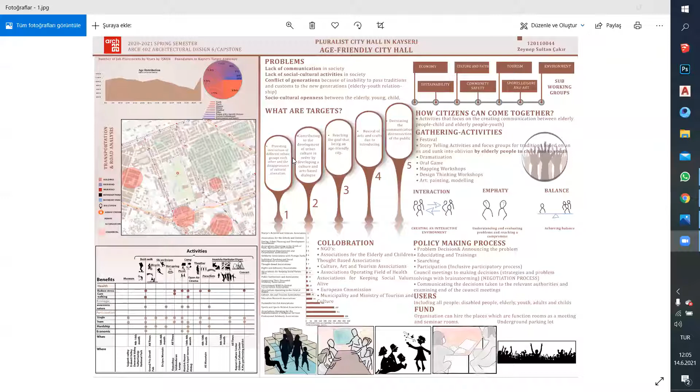The aim of the project is creating a pluralist city hall in Kayseri. The problems are lack of communication in society, lack of social cultural activities, conflict of generations, and social cultural openness between the elderly, young, and child. These can come together with some activities. The gathering activities can be festivals, storytelling activities, dramatizations, oral games, mapping workshops, design thinking workshops, and arts like painting and modeling. The most important thing is creating integration, empathy, and balance between the society.

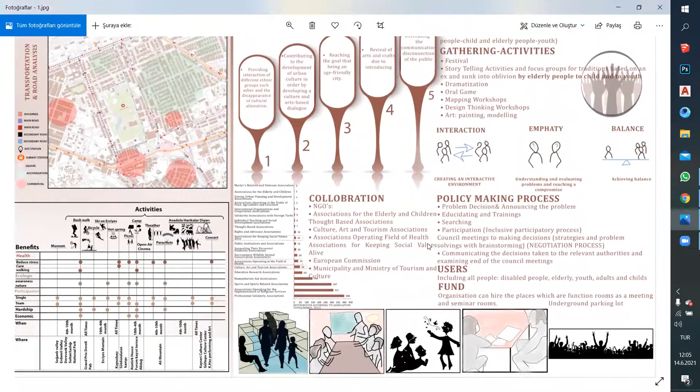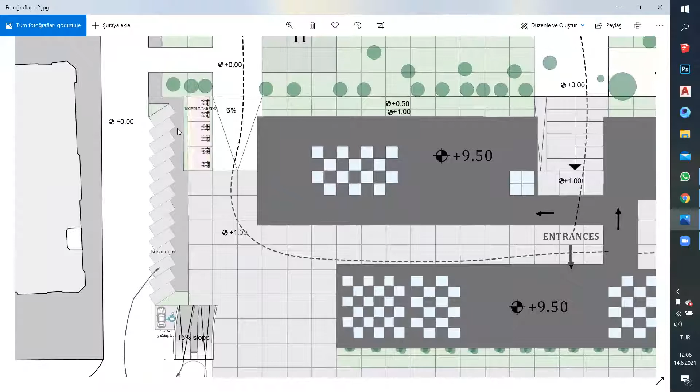On the site plan organization, the most important point is Mimar Sinan Street because it has a connection with the city center and it became a pedestrianized zone. The road is specialized for pedestrian and bike users, and traffic is slowed. There are some regulations of vehicle traffic, as you can see from this point. There is underground parking entrances, a parking lot, and bicycle parking also placed in that area. The entrances of the building are from this point, which connects the access from the park.

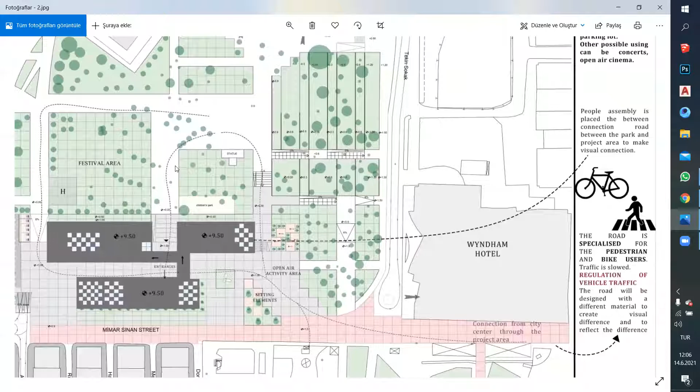Another important point is this area. There is a people assembly in that area. The people assembly has a connection between the park and the project area with these arcs. There's open air and sitting elements in that area also.

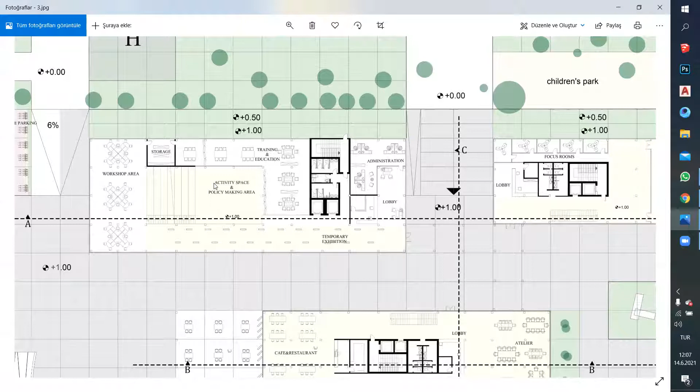On the ground floor plan organization, there are mostly communal areas. In that building, there is a lobby, atelier, and a cafe and restaurant. In that place, there's a people assembly, as I mentioned before. In that building, there is administration, training, education, and workshop areas. The activity space is placed in the middle of the building. The activity space is important because it makes a visual connection with the upper floor.

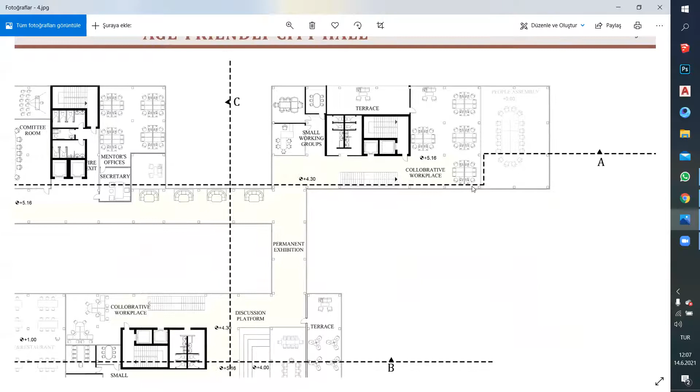There are some important options we will see on the sections. On the upper floor, there are committee rooms, meeting rooms, and seminar rooms. There are mentor offices with this bridge, reaching small working groups and collaborative workplaces. There's a visual connection with the people assembly in that place. With the permanent exhibition, we are reaching the discussion platform.

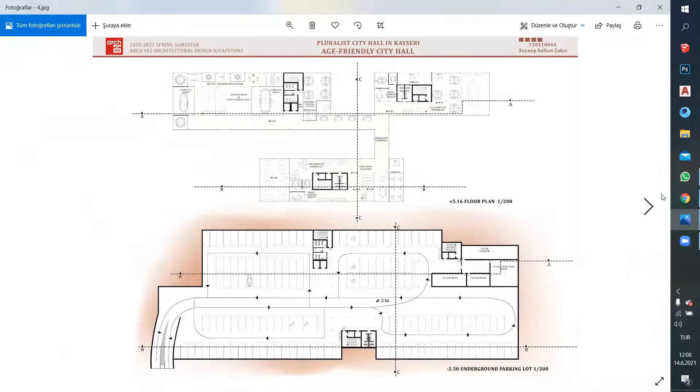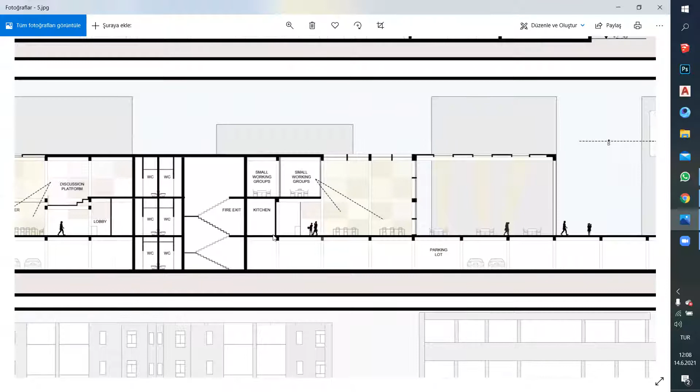There's a visual connection also with the ground floor, with that atelier, and there's a collaborative workplace and small working groups in that area. This underground parking lot is the entrance, and there's a technical facility in that area. In this section, the atriums are visible, and the visual connection is also visible between the meeting rooms and the activity space, and also between the people assembly and the collaborative workplace. These are sitting areas between small working groups and the cafe, and between the discussion platform and the atelier.

On the section, we can see the connection between Mimar Sinan Street and Mimar Sinan Park mostly. On the facade organization, similar to the site plan organization, the grid system will be used. In the east elevation, we can see the connection also with Mimar Sinan Street and Mimar Sinan Park. It's visible in that place.

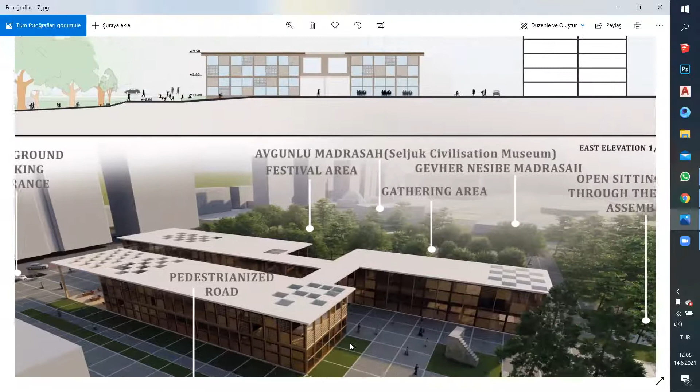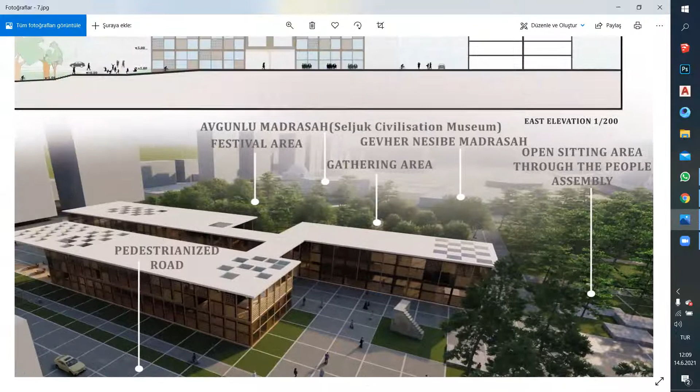This is the underground parking entrance, this is the pedestrianized road, and there are important historical buildings in that area, which are Avgunlu Madrasa and Gevher Nesibe Madrasa. And this is the festival area. In that place, there is a sitting area, as I mentioned before. On the conceptual section, it's taken from this area. We can see also visual connection, and also there are roof openings in that area.

On the construction, a wooden structure will be used. The main material is wooden in that building, and for the floor, cross-laminated timber will be used. For the columns, glue-laminated timber will be used. For the facade organization, a double facade system will be used. Outside, there's glass; inside, there are wooden profiles.

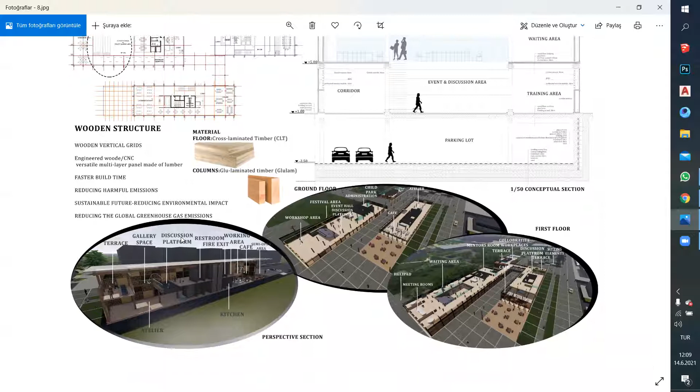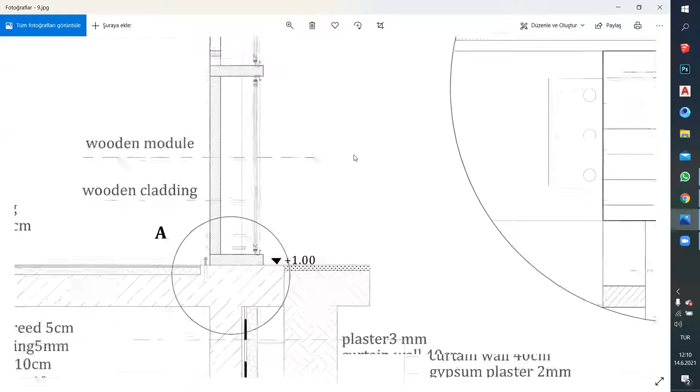In this perspective section, we can see also the visual connection, and these are the spatial organization. This is the system section of the building, and we can understand from this actually the inner frame system. There are wooden modules, perforated and also mesh ones.

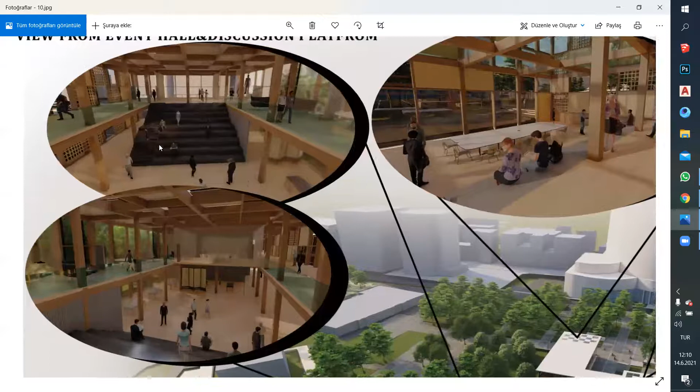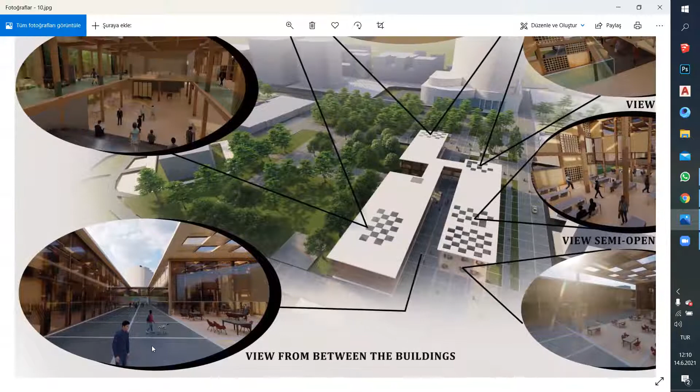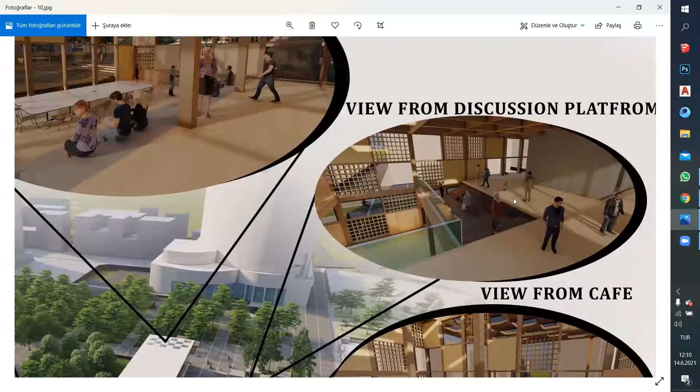These are the 3D representations. This view is from the event hall and discussion platform, where the connection is also visible, like this. This is a view from between the buildings, and this view is from the semi-open cafe area. This view is from the cafe, and this view is from the discussion platform. This is the people assembly, where the visual connection can also be seen, and the sitting elements can be seen in that area.